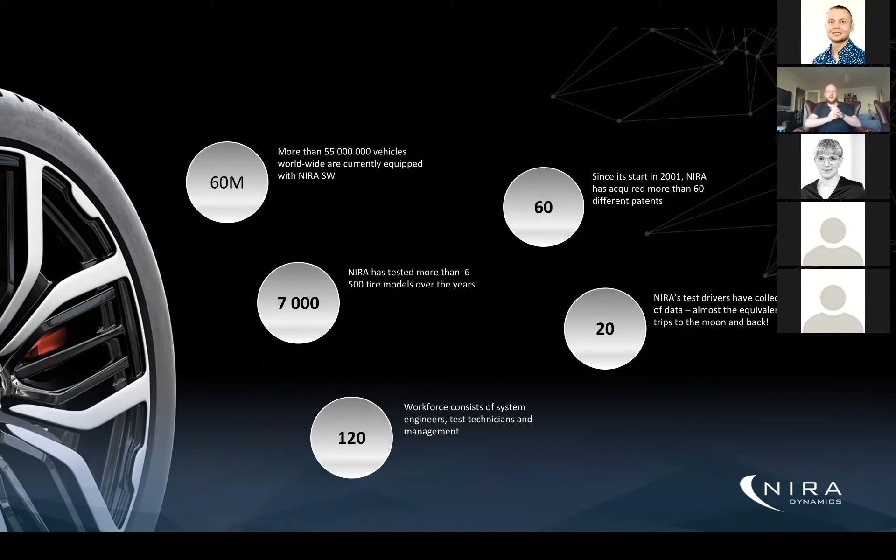We have tested a lot of tires. Our specialty lies within the interaction between tires and the road surface. So we have tested 6,500 tires, and if we add up the driven kilometers we have gone back and forth to the moon 20 times. So that's quite a lot of driving and testing and test data that we're working on.

As of today, we are 120 people, which consists of systems engineers. We also have test technicians who are planning and executing all these tests. They are the ones driving back and forth to the moon, basically. And then we have management as well. The headquarters is located in Linköping, Sweden, and we have operations in America, South America, Asia, and Central Europe. So we are more or less widespread all over the world.

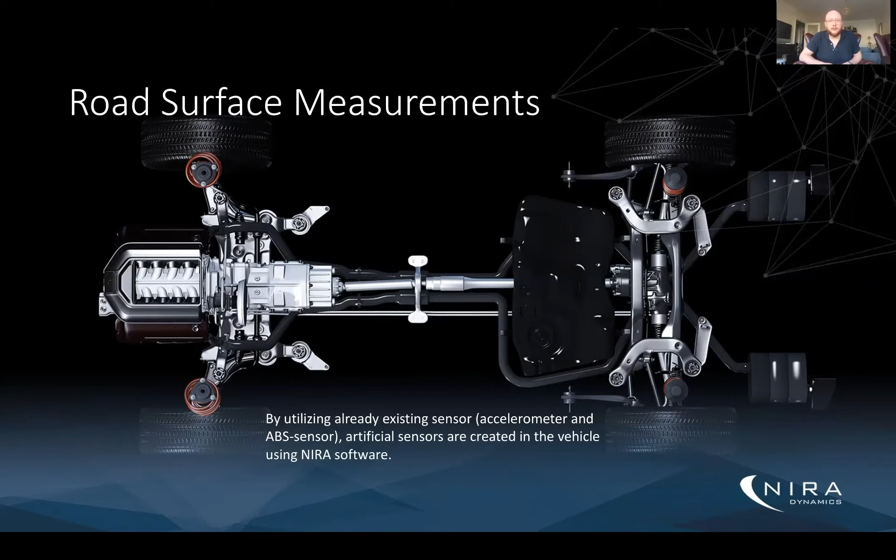So we basically sprung from the question: can we detect pressure losses utilizing already existing sensors? But in recent years, the other question was, can we measure the properties of the road surface using already existing sensors? And the answer is yes. So what NIRA and my business unit is doing is utilizing already existing sensors, the accelerometer and the ABS sensors, or how fast the tires are rolling. We create artificial sensors generating more insightful information, such as friction and roughness. I will come back to that a little deeper. And that is done using only software.

So what we do is measure the unevenness of the road surface and also the potholes. One very important question is how uneven is the road, basically. We do that by looking at how the vehicle experiences the road, for instance how it is shaking and traversing over the road, and we detect potholes because when you drive into one, you get some forces and fluctuations in some of the signals.

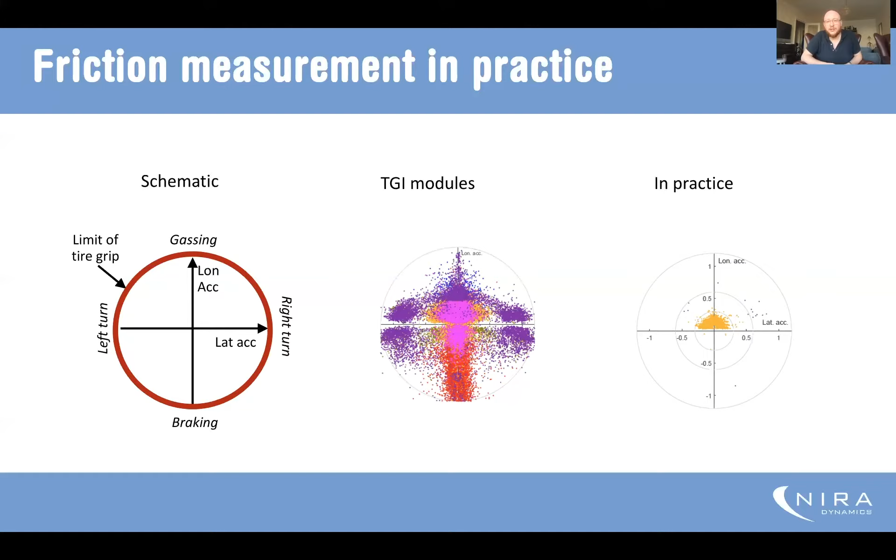And that was quite a lot about the operations within the vehicles. So what NIRA is actually doing is that we are doing these calculations in the vehicles, and we are sending that to the cloud to be processed. We are sending information from multiple vehicles up into the cloud: roughness information, pothole information, friction information, and environmental information to build the most comprehensive insights in the cloud.

And when we started, that was prior to GDPR, but then the regulations came, which put a lot of questions on the agenda, basically. And there are still a lot of questions to be answered here. There are still practices being made into law or interpreted in the Western or European world. Most of how the cases should be judged is done through praxis. But this raised a lot of questions.

First question, is it personalized information that we are sending? Yes, partly. And the next question, how can we manage this in a structured way? That raised a lot of interesting questions. So apart from the algorithms in the vehicle, we also have concepts for anonymizing the data, basically, so it can be used. I think this is the real uprising field, the GDPR field.

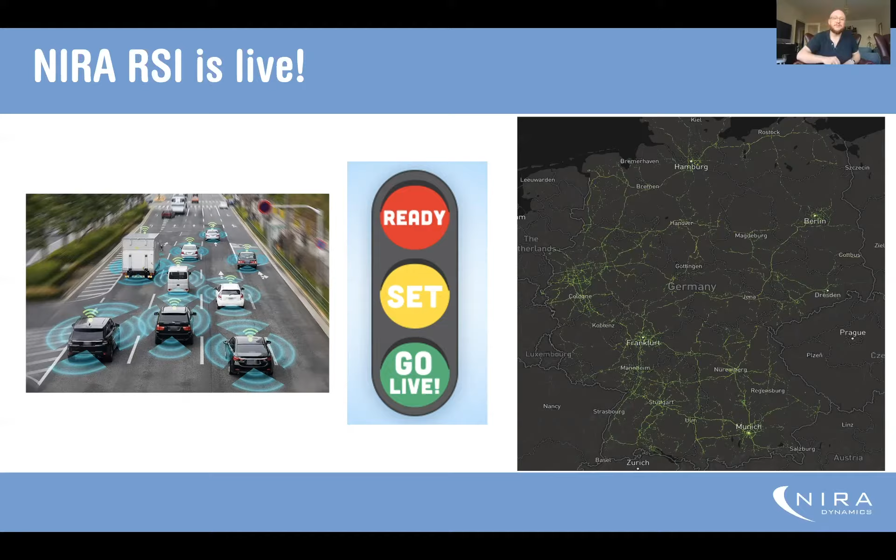So last Friday we had some celebration online, of course, due to the new corona restrictions, but we were celebrating this, which is a huge milestone for NIRA, but also for everyone that can use this information as a next step. And that leads us into the really interesting questions, actually. How can this friction information be used in large scale to actually improve and change industries?

So I want to highlight something first. How do weather events impact roads? I guess a lot of the participants within this session are from Sweden. So you basically know that during summer it's usually quite good friction, but then the snow comes and the friction gets quite bad, and that is common knowledge. However, most often people don't adapt the speed to the current conditions, partly since the current conditions are quite hard to judge by eye, but also partly because they don't appear that often and you are not used

to it. So, for instance, in the US, they had 6 million accidents each year, and approximately 21% of those were related to weather. And a lot of these accidents are actually due not to constant bad road weather conditions, but rather to changes in road weather conditions. And I can show that on the next slide. So this was research carried out in Sweden, for Swedish data.

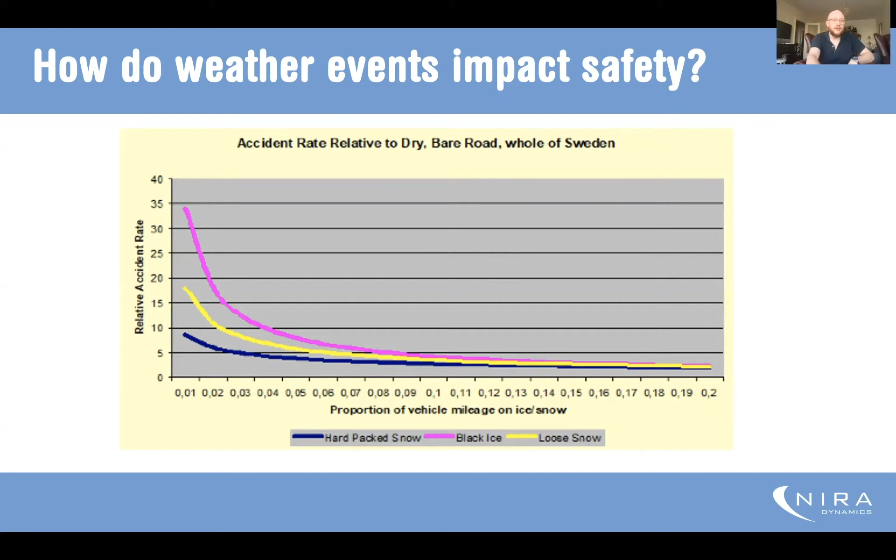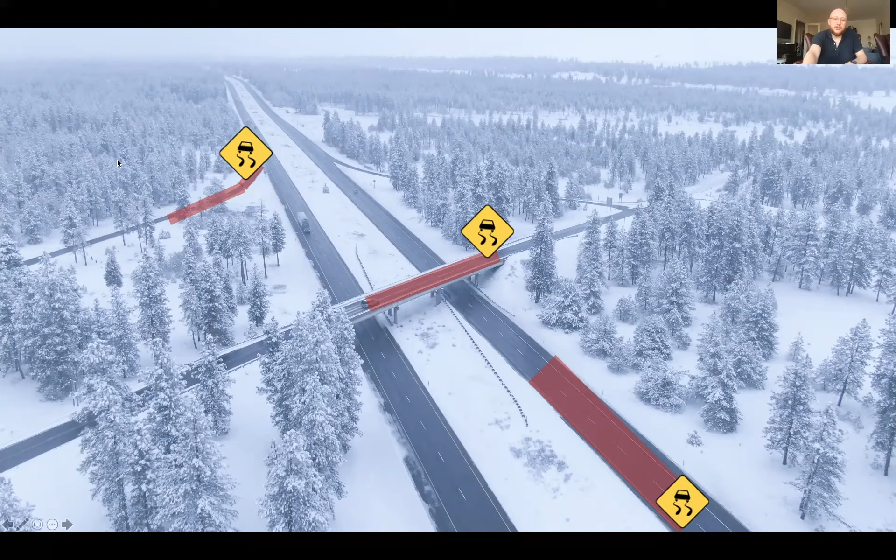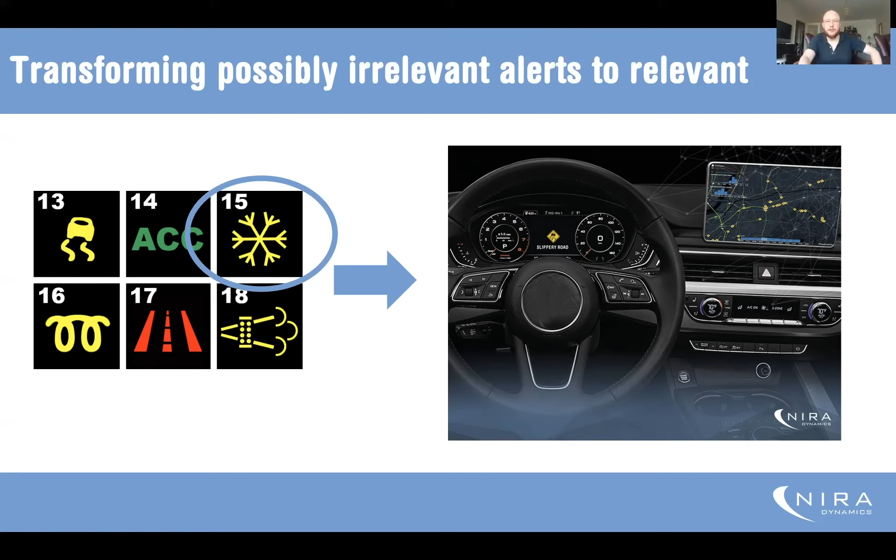And based on that, you can imagine more use cases. You can imagine that we make this short detour to avoid this very slippery area. If you're going shopping or going far ahead, you can actually select the route to reduce the probability of encountering dangerous conditions. There are huge opportunities for this data to be used to increase road safety.

And it is available as of today. And it could also, for the future, of course, be used to enable full-scale knowledge for autonomous vehicles. So imagine that you're developing an autonomous vehicle that you want to have some standard on. You want to say if there is an obstacle or if anything is happening 200 meters ahead, we will most likely be able to avoid it.

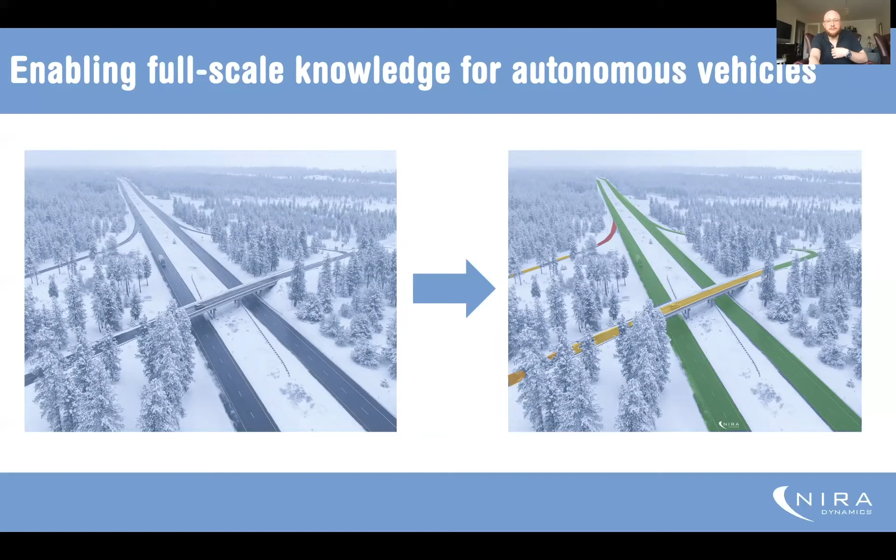This is my field, we're also working on enabling more knowledge of the road status for winter maintenance. So what is actually happening is that they are out salting and plowing the roads. Basically winter maintenance actions are being taken on the road network. And always when you do something, it is of high importance to know what was the outcome. You need to be able to judge, was it any good? Or how else could we be certain that we did anything right?

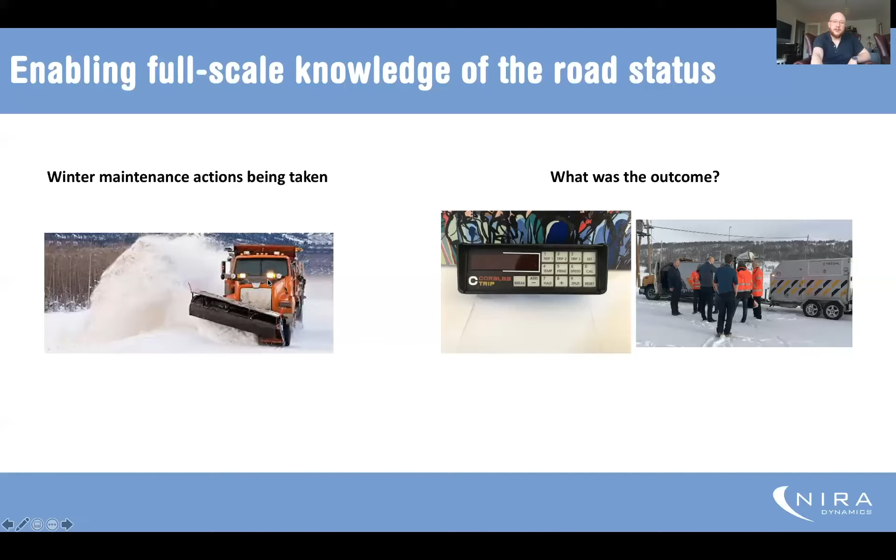What we have today is local testings. So maybe someone is coming and driving on the road and doing an ABS brake test, a Coralba brake test. What could be done with this type of connected information, the NIRA data, is that we can scan the whole road and pinpoint, okay, the main roads were very good in this case. We have good friction, green friction on the main roads. However, the exit lane wasn't properly treated, and we need to improve in the exits.

And to be honest, usually you're driving at high speed in the main lane, but you are most often not utilizing high friction potential. The only time you need high friction potential in the main driving line is if you need to emergency brake. That doesn't happen often, but when it happens, you need that friction. However, where you are using quite a lot of friction is when you're turning and accelerating, at the exits and entries to the highway. So there you need to have good friction, else you risk skidding off the road. And that is very important that could be pinpointed, visualized and improved on.

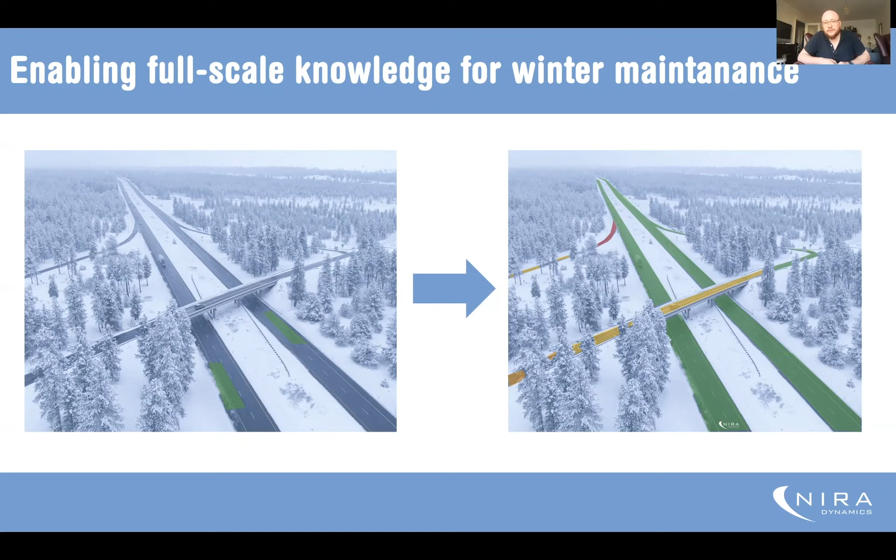We're also looking into a quite interesting field since we are collecting several parameters that are related to weather. So basically around Sweden and a lot of the Western countries, there are what's called RWIS stations. It stands for Road Weather Information Systems stations. And they are measuring, for instance, air temperature, humidity, surface temperature and so on. A lot of meteorological parameters.

And if you compare that, a lot of these parameters are actually measured by the vehicle fleets as well. Maybe at a little bit lower quality, but at an enormous scale. And for instance, these RWIS stations, we have a little bit above 800 in Sweden.

So we're getting point-wise measurements. So this vehicle fleet can actually, together with the friction, be used as mobile and moving weather stations, covering a lot of the gaps between the RWIS stations, and therefore contributing to an even better picture regarding the development of the status of the roads.

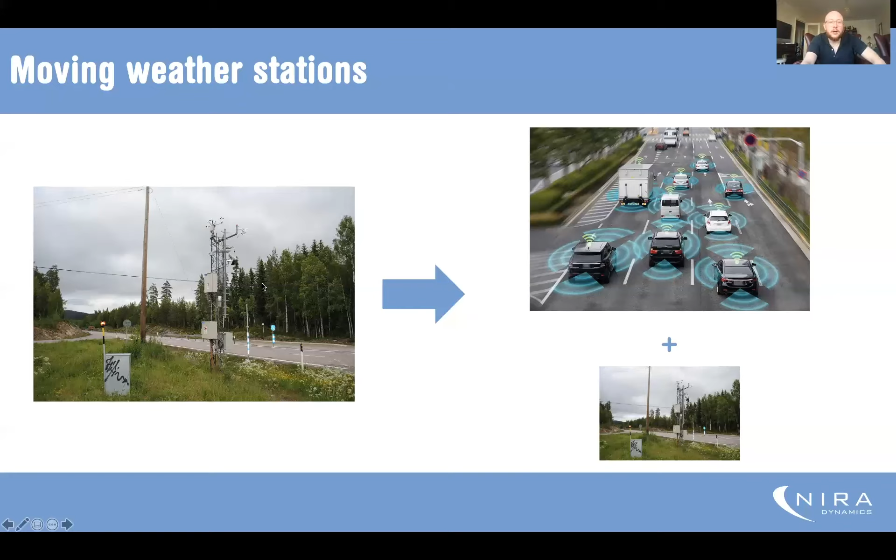Okay, as I said in the beginning, we're also measuring the roughness or unevenness and the potholes. And this is being done today with a quite expensive measurement instrument that is mounted onto a vehicle. It's a laser scanning unit actually, so it's very expensive compared to the Coralba that is basically measuring the acceleration. So it's mounted to a vehicle, and then this vehicle is driving around in Sweden and in every other country measuring the road status, unevenness, potholes, cracking and so on.

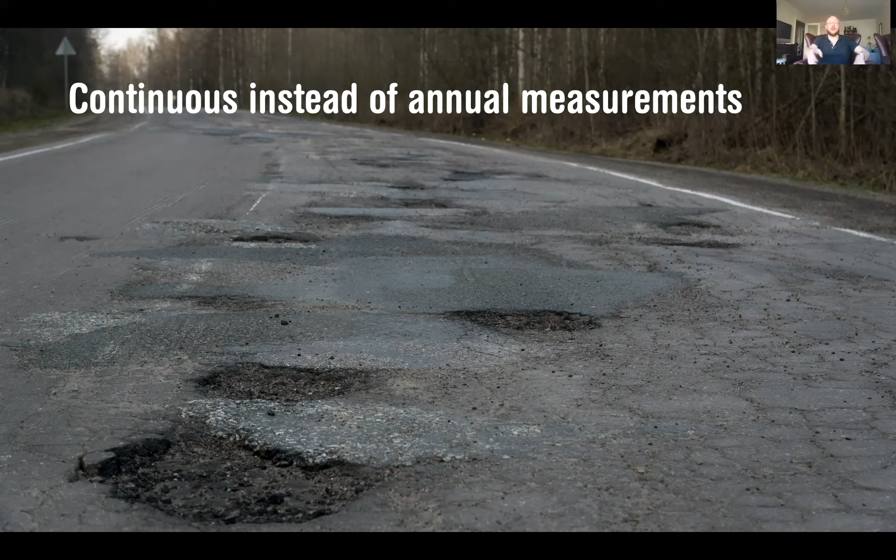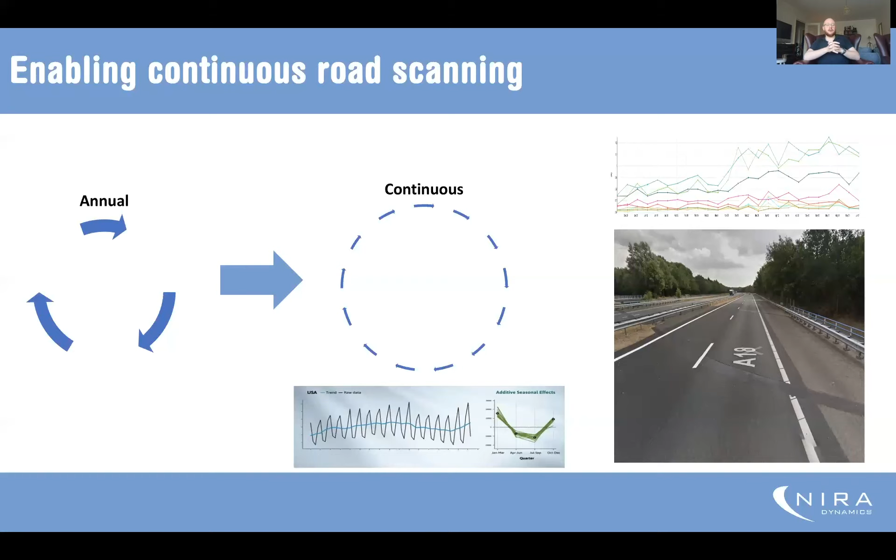Okay, that was what I wanted to show on this Tech Tuesday. So we started off by looking into what we are doing in the vehicles and how this information is transferred to the cloud. And then we had some use cases where this information can be used to improve both road safety and road maintenance. I can mention traffic management as well. A lot of cities have dynamically allocated speed signs. So if the road is starting to get slippery, the speeds can be reduced, thereby increasing the safety of the roads.